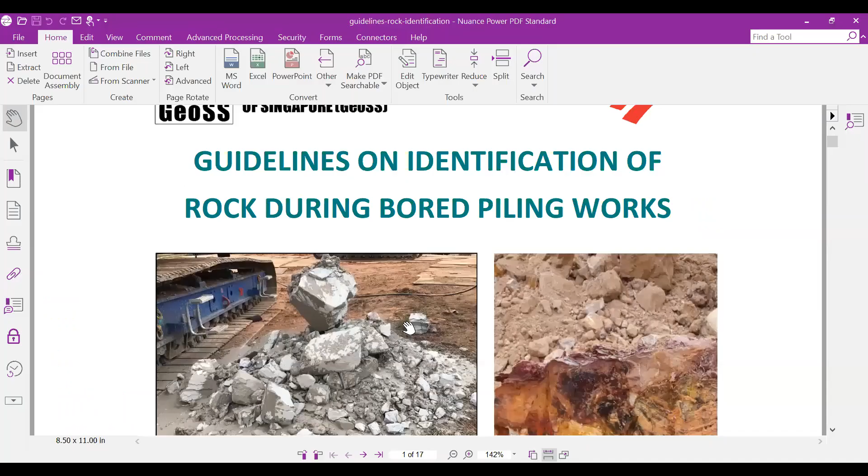Now we are in this actual guideline that we refer to now, the 7 criteria, right? Remember? I mentioned about the 7 criteria, right? So you can see a very new one, 2nd September last year.

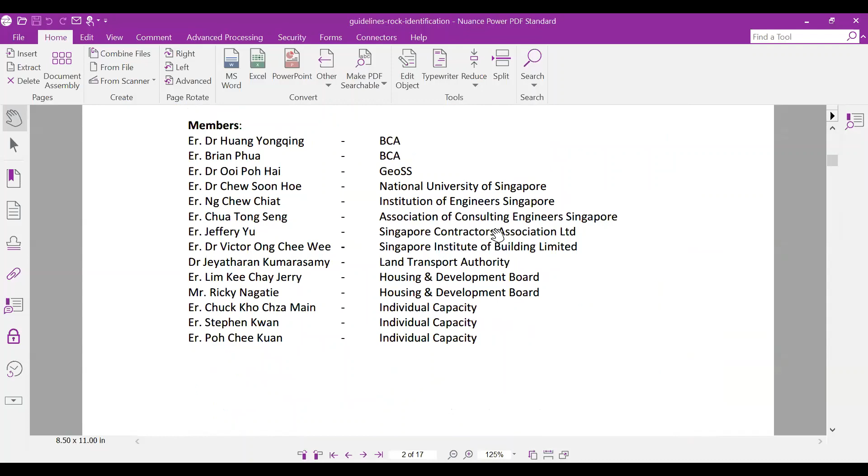Now when I saw from the message, Mr. Sultan San, right? Mr. Sultan San, are you here? Sorry, I cannot pronounce your name properly. You mentioned, he replied a very good thing.

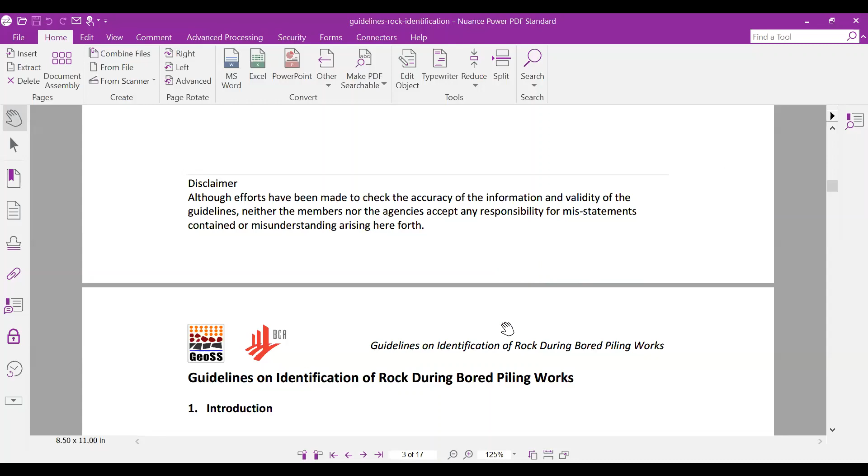He said, we design for the worst case. That means the worst quality of the rock, which is G3. I agree with that because that is usually what I do. Because I don't know on site whether you see is G2, G1 or G3. Whatever we encounter for rock, we do this kind of thing.

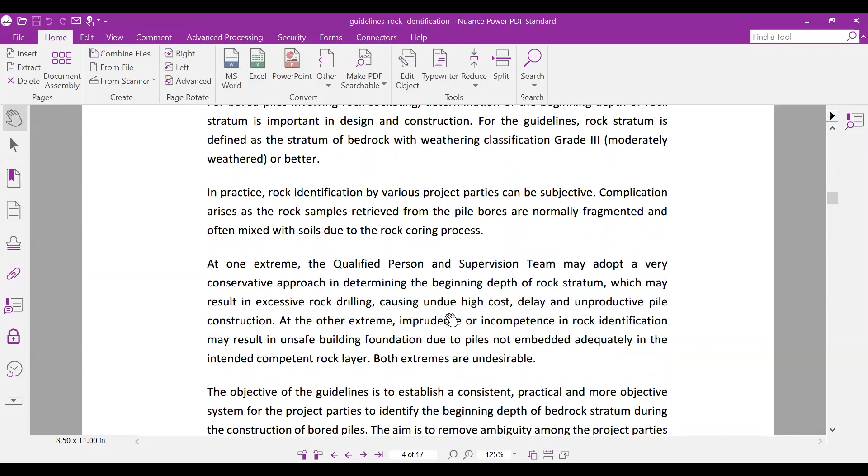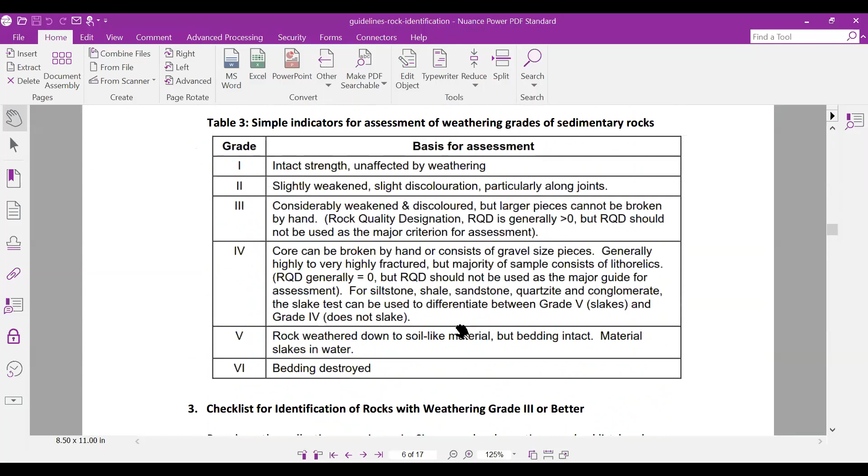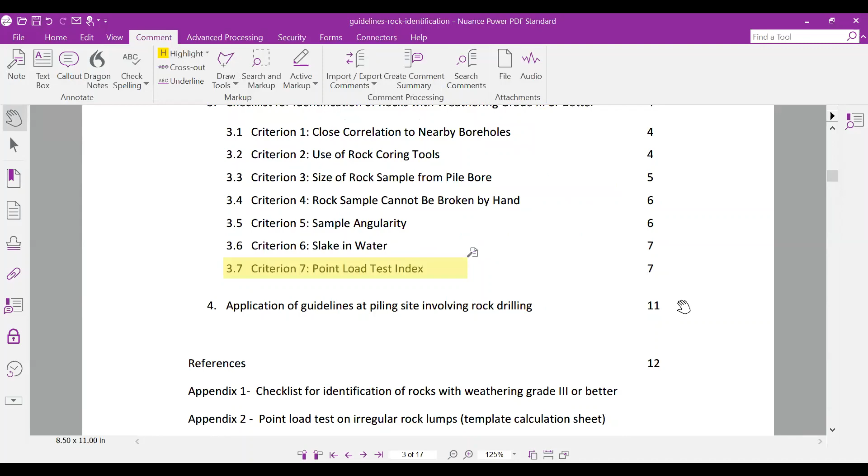Now, as you scroll down this thing, the most important thing you need to do is, of the 7 criteria, the most important criteria you need to follow is this thing, the point load index. If you recall what I tell you during the design, in rock, we design according to unconfined compressive strength.

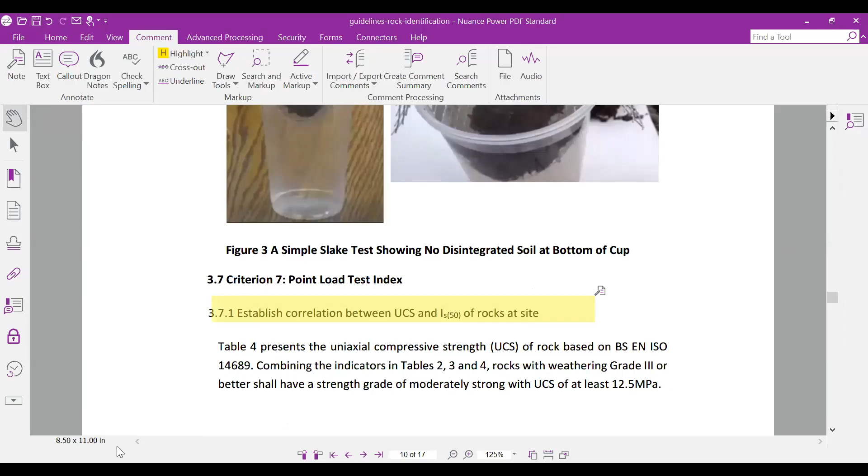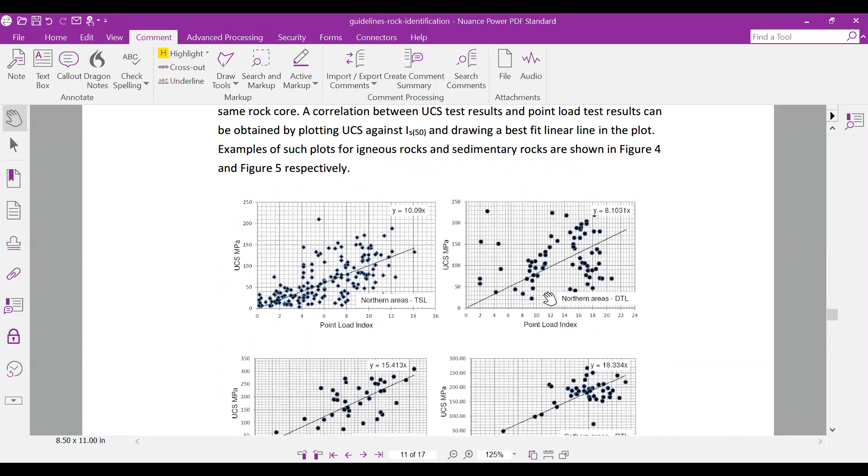And why we need to do the point load test? Because we can correlate the unconfined compressive strength with the point load test results. Usually you can see like that. You can see this kind of correlation. You're supposed to do this correlation.

So Marvin, you must listen carefully now. Calvin, you also must listen carefully now before you all start fighting on site. Sometimes in the middle of the night, I receive a call from my RE or RTO fighting with the boring contractor on site on this kind of issue. Usually I will scold them because they don't understand instruction.

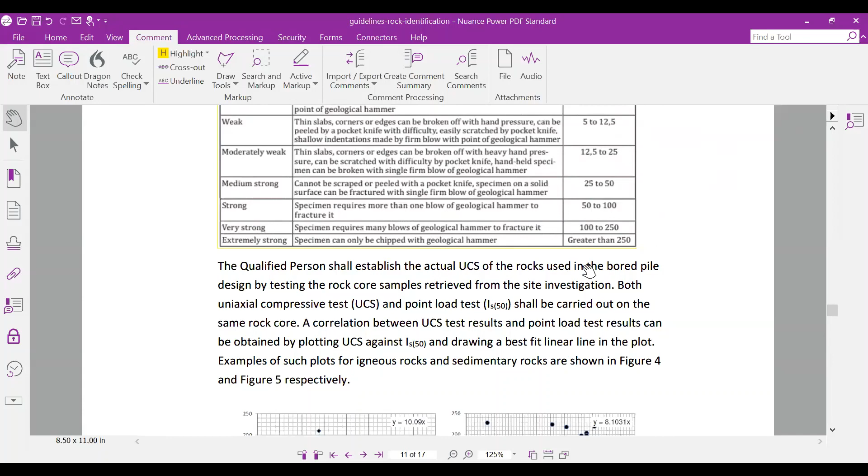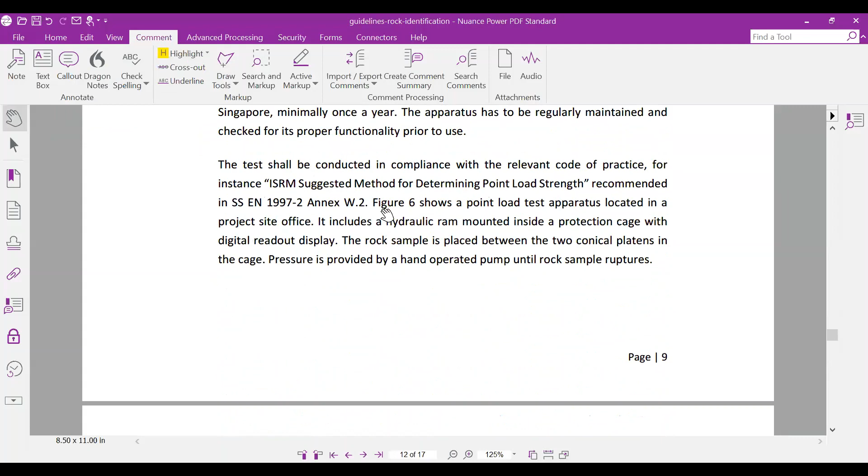What you need to do is, according to the new guideline, is very clear. Once the core barrel releases the rock after they drill, you can go and do the point load test index on site. Okay, you can do it on site. Read carefully. Point load test from rock sample from bore piles, pile bores. You can do it, you can actually do it on site, and you're supposed to do it on site. So it then goes back to the first thing.

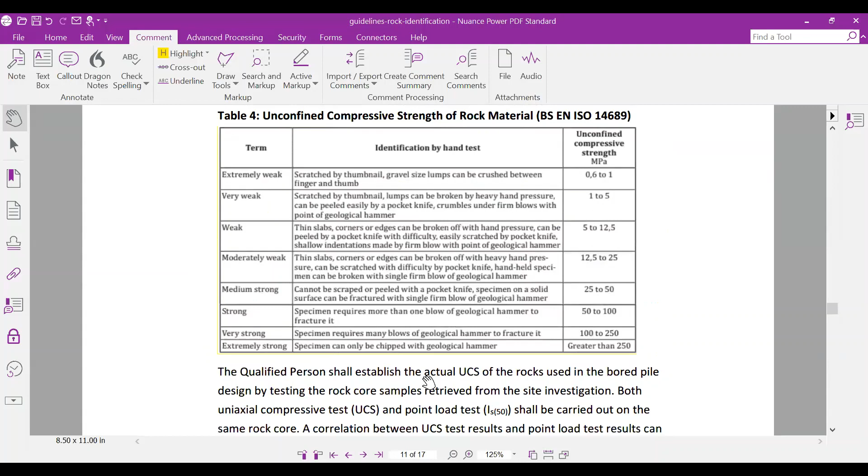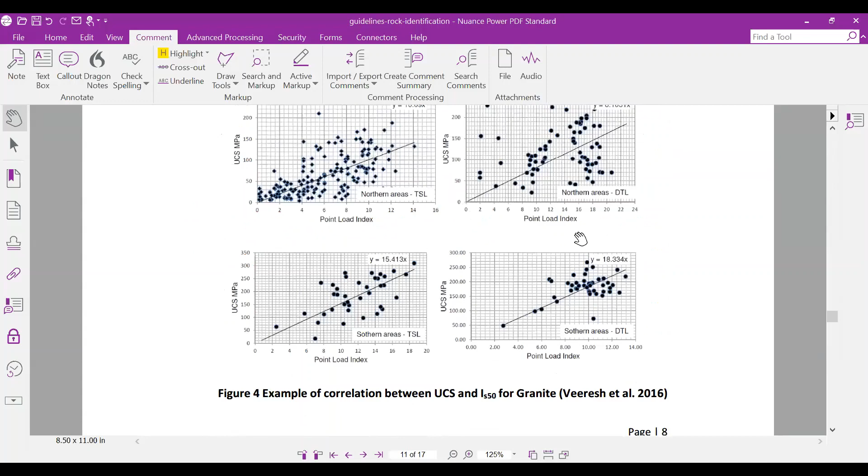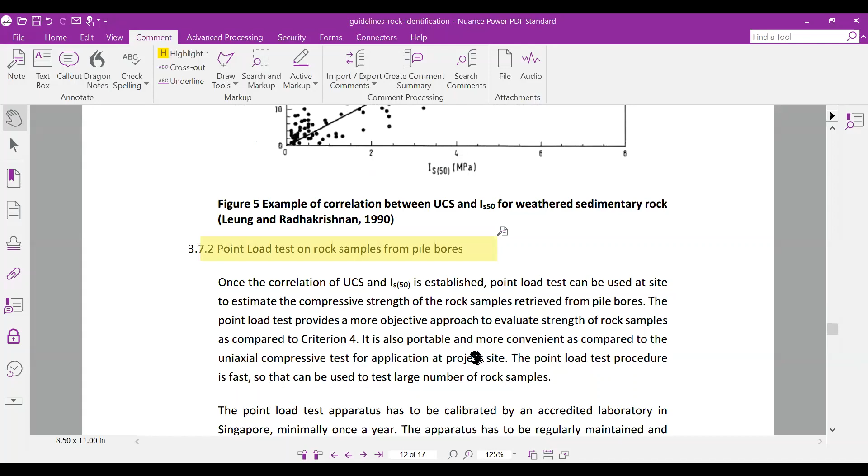In the first place, when you plan your SI, you must always plan for point load test index and also plan for unconfined compression. Then you establish this kind of correlation. Then on site, from the bore hole, you do the point load test. From the point load test, then you start to correlate to UCS, then you confirm whether that is the rock according to the design.

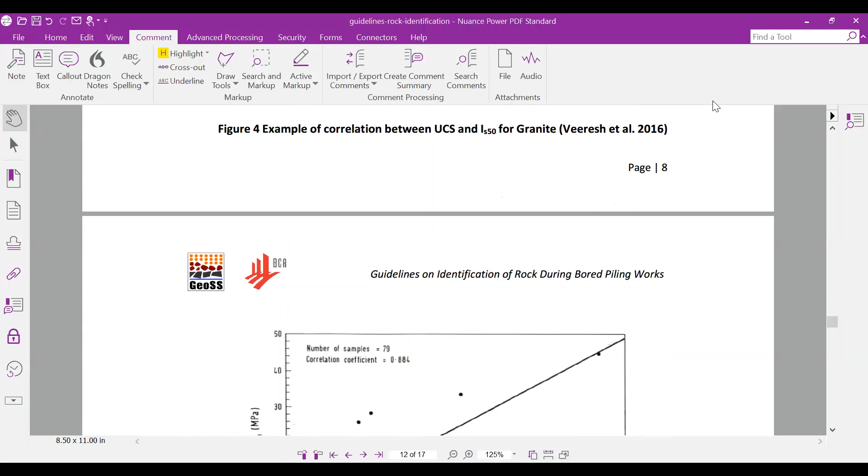Marvin, you understand? Marvin: Yes, kind of. So you correlate between UCS and the point load test, right? Yes, that's what you're saying.

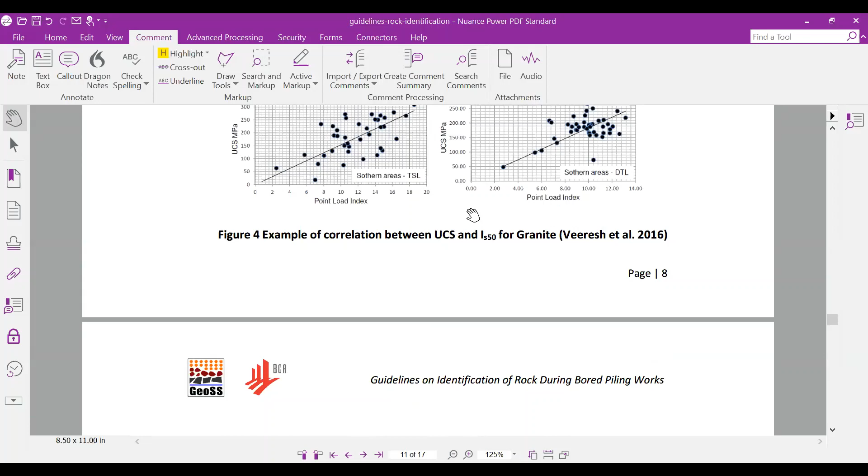So okay, Kevin. Ask your boss, Mr. Pua, to go and buy one set of this kind of point load test index equipment on site. Very cheap only. Before you start any rock project, boring rock one, you ask them for this correlation. Then on site, you test ready, correlate from the chart and tell the RTO, we do the test ready, the test result is like that according to design.

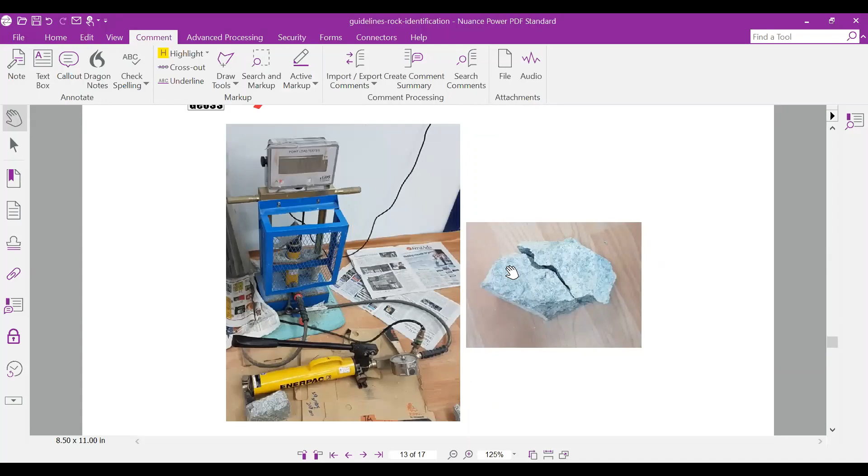This is the design compressive strength you want. So this is a socketing length. No need to discuss, no need to argue. Everything got number to support. Clear? Clear or not? Okay.

I hope all piling contractors follow this manner. This kind of cheap thing also don't want to invest. Every day go and argue with people on site. Waste of people's time. Correct or not?

Now, second question by Anthony just now. My previous RTO answered this question very good. Dinesh, where are you Dinesh? Yeah, hi sir. I'm Dinesh, you understand Anthony's question just now right? Yeah, I understand. If you see SPT soil, Anthony said that on site I cannot verify.